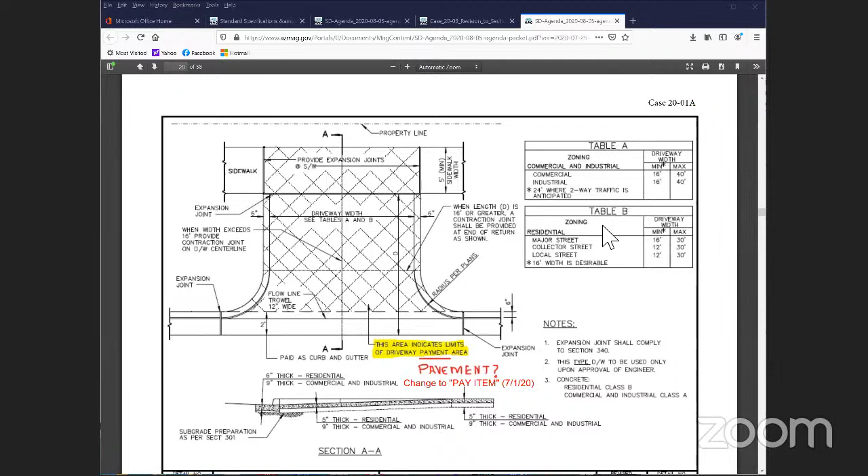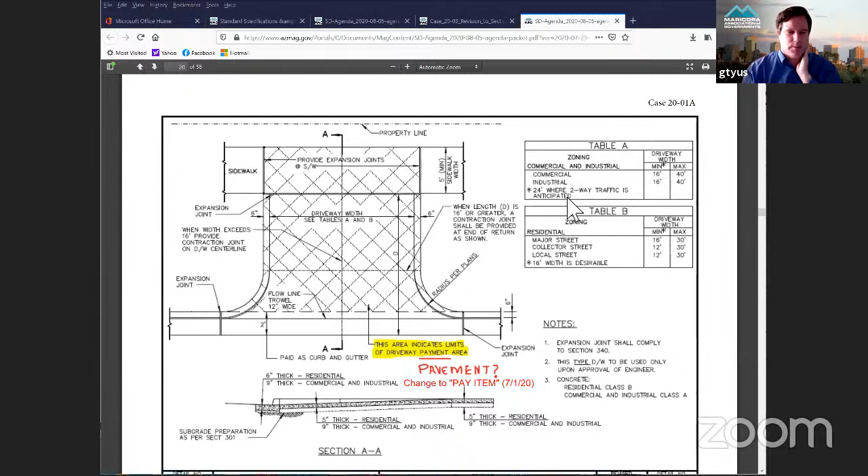Moving on to case 20-01, miscellaneous corrections. Looks like we're up to letter F. Oof. Not sure if there's any additional bloopers cases that might be added, or I think actually we're not allowing any more cases. So there's no new ones, but there were a couple things that were discussed last time that I made updates on in the markups on the details. For example, on the first one, 20-01, I think it was decided last time to change it from payment to pay item. Okay.

Hey, this is Carl. I suggested the pay item, but I was looking at this. I think it's showing a hatch. The diagonal hatch there is the area of the pay item. And again, I kind of wonder if this is older drafting where we might be better off shading the area, because that diagonal could be interpreted as something else besides an area. I don't know if we just want to stick with just changing the word, or would you want to also have it show a shaded area like we did on the other detail?

So Carl, is this one that you're putting through? This wasn't originated from me, but I'm the one that suggested. It was first indicated as pavement, and I said no. I believe it's meaning the pay item area for the measurement and making a progress payment. So I'm just suggesting that should that area be a shaded area like we did on, I think it was 550, the scupper. Right, the spillway.

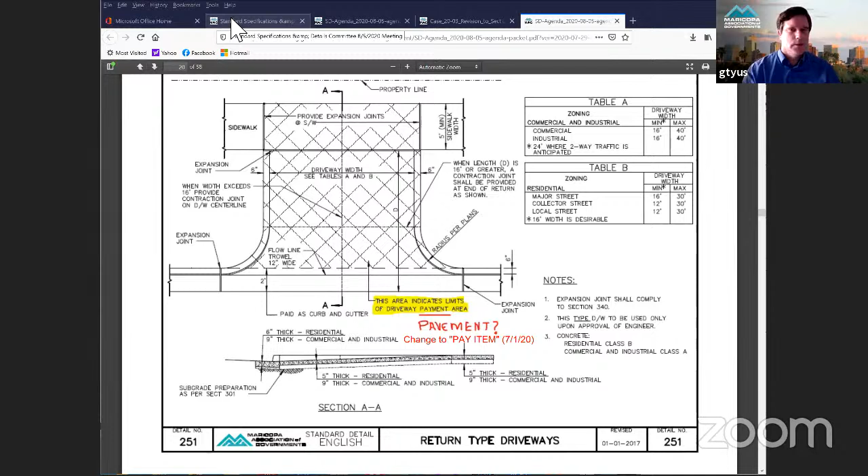Go ahead, Carl. Was it 550 the one we did for the spillway? Or am I thinking of a different one? Yeah, it was the spillway detail. I think we can maybe work with Gordon on that when he's preparing the specs. Maybe that's just a graphics issue we can deal with. But I kind of agree with you, Carl. It could be misleading.

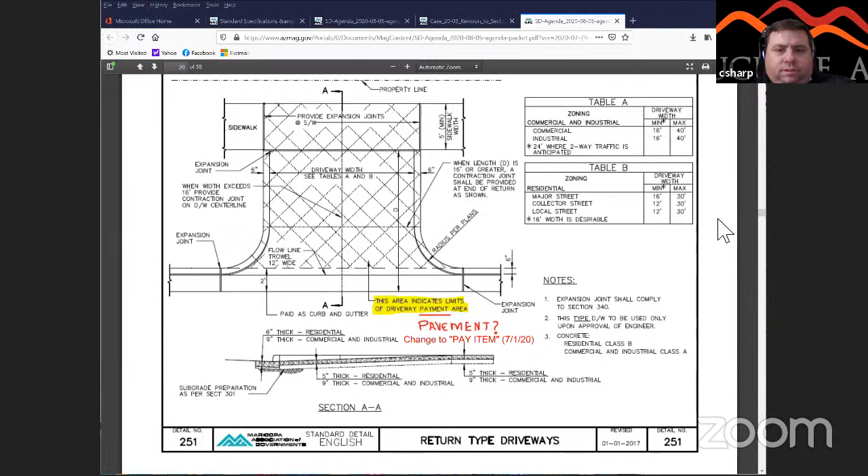I think it's fairly similar to some of the head wall graphics for reinforcing. That's kind of what it looks like. Well, I'm okay if they want to put that kind of steel in there. Well, there's nothing else that indicates steel or mesh or anything. So maybe Gordon could give us a sample of what it looked like shaded as opposed to that hatching. Yeah, I can mess around with it and see if it looks better. You've got to make sure the shading doesn't overpower the other line work there, but I think it would help the detail.

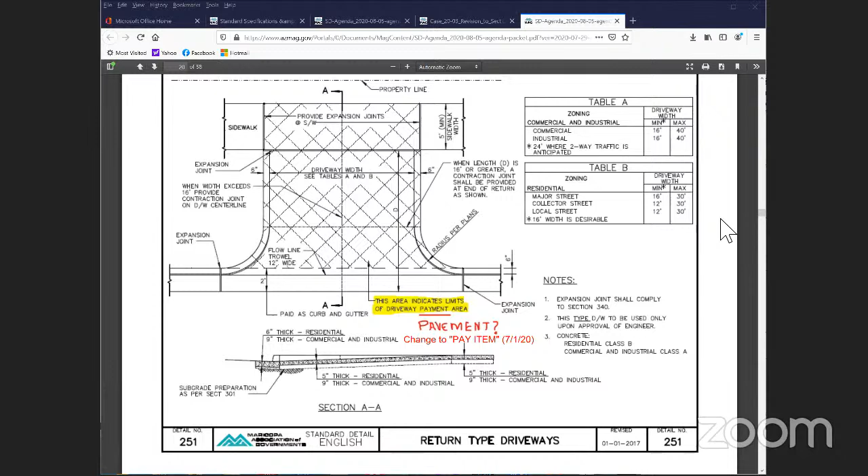Okay. And letter B is just taking the revised off of the detail. Letter C was just changing the ASTM class from 30 to 35. It's from 30 to 35. Okay, it already shows the correction. And moving down to D is just removing the ASTM. And E would have been just this reference to 340, just the simple small change.

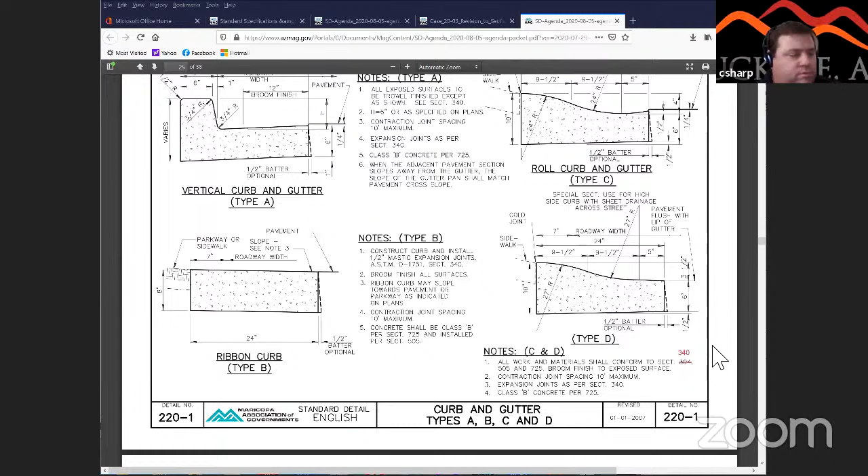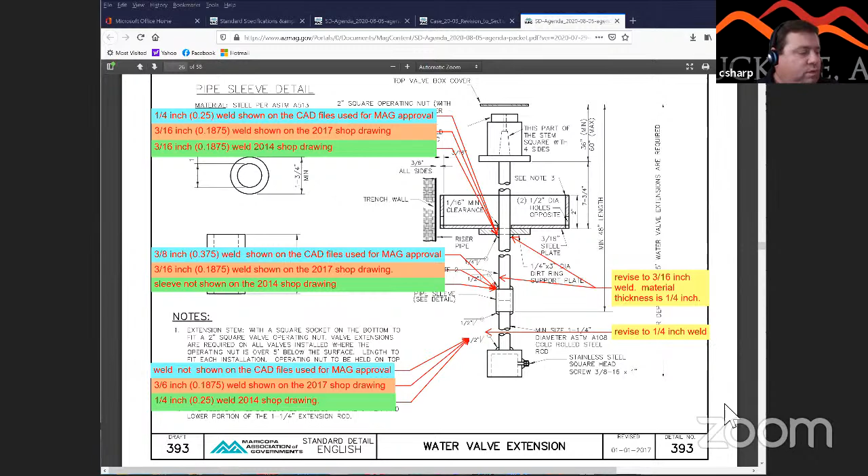And F was the valve extension, just changing the welds on the plate and the pipe sleeve. So the plate and the pipe sleeve would be 3/16, and the nut at the bottom would be a 1/4 inch weld, just to be consistent with the manufacturing. So if we don't have any more, I'd like to move on to item number 7, case 20-02, detail 346 fire line detector check valve.

So when are we going to vote on the bloopers? Next month, or October, or what? I was planning to have them on the agenda for next month. Hopefully we can finish everything up then. All right. So do we need to note in the minutes that this case will be up for vote next month? Yeah, I think that's a good idea, just to make it clear. Okay. All right, thanks.

So item number 7, case 20-02, detail 346 fire line detector check valve. Warren, you've got some information on that? Yes, I do. Gordon had emailed to let me know that this was discussed at the Water and Sewer meeting, and City of Phoenix may still be using this detail. I wanted to discuss with the group how to move forward with it. Personally, I'm okay either way, if it helps City of Phoenix to keep it for now,

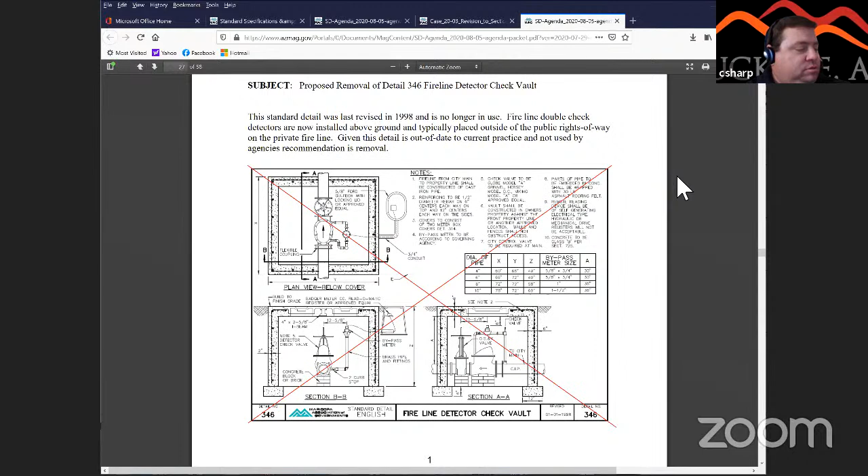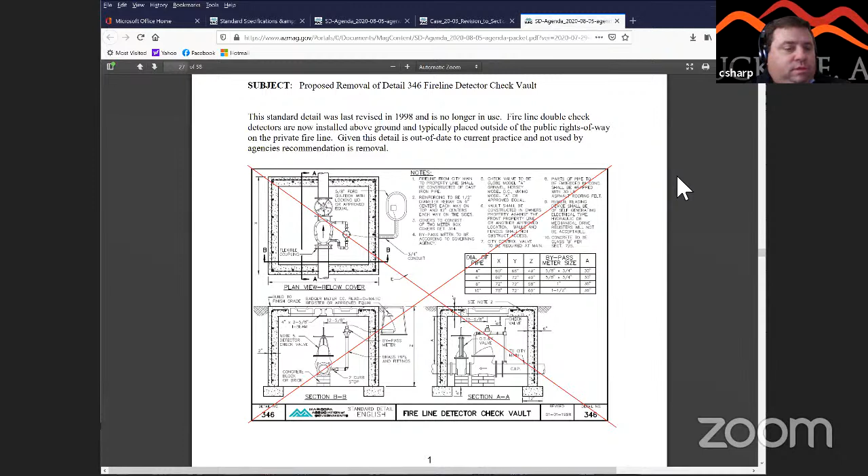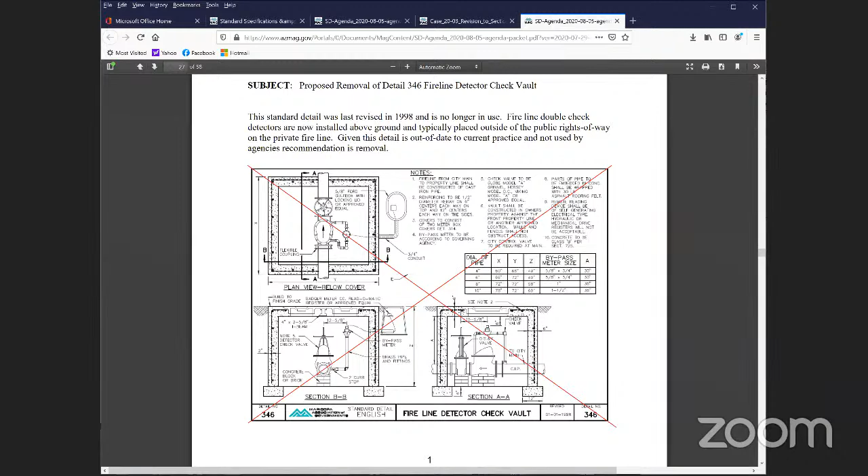That's an option. It would not be a carryover case necessarily, right? Because I wouldn't be the sponsor. Okay, so we would pull it from the 2020 case list, and then somebody could revive it for next year. Is that what we're saying? Yes. This is Peter. As part of the outside right-of-way, we could revive that or bring it up as a case next year in terms of just updating the standards component of it, the references to manufacturers.

And keep in mind, if we were to create a detail, I mean, yeah, the easiest out is just to revise this current detail. But if we wanted to incorporate other above ground double detector checks that are currently being used as more common, then that would be a good option. So you'd have a type A underground, type B above ground, however you want. Right. So it may not be that easy.

No, but we could start that migration, and we've been wanting that for a while, of moving the check valves anyway to an outside right-of-way. Makes sense. So it sounds like, Peter, you would take it on as a 2021 case for outside of right-of-way? Correct. I think that'd be, again, low-hanging fruit for us to grab the first ones just to kind of get the ball rolling on that. And when we get to our group, we'll talk about it a little bit more. We're really getting a lot of expansion of bodies to help now. So this may be a good one to add to the list.

Okay. Well, I think that's a pretty good idea. Is there anybody out there who has opposition to it? Does anybody see any issues with it? Not hearing anything, so it sounds like that's what we'll end up doing: we'll pull it from the 2020 case list, and we'll reintroduce it next year with Peter, with the out of right-of-way group.

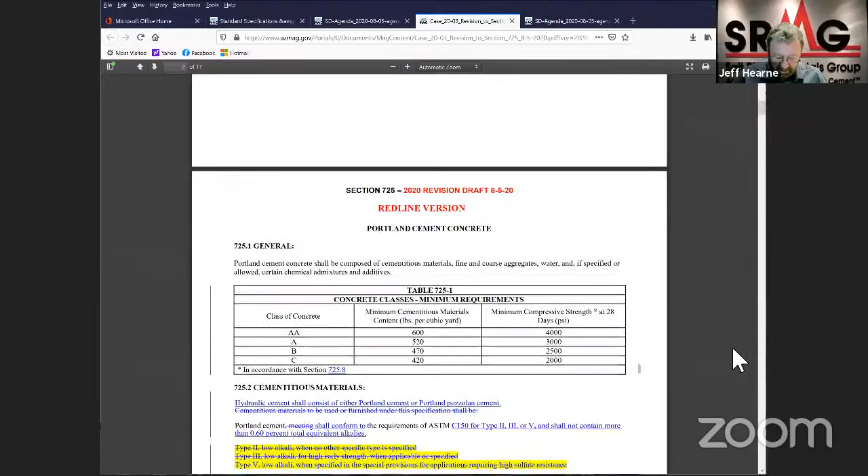So, all right, moving on to item number 8, case 20-03, revision to section 725, the Portland cement concrete. Jeff, are you out there? Thanks, Craig. Gordon sent you guys a revision. Sorry for the last minute revision this morning. So what's in your packet has had a slight revision to it. He's got the cover page up there, and it's just basically some additional language added for clarification to section 725.9A4. So if you want to turn to page 7 of the 725 section, to that particular subsection.

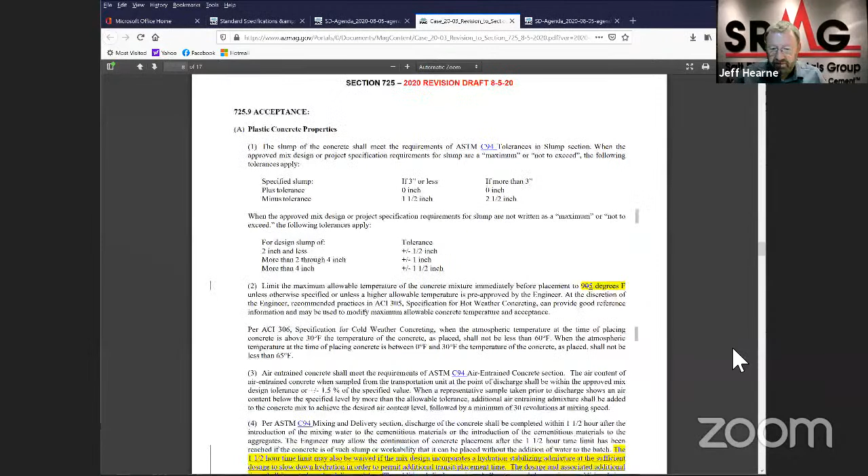Over the last couple of months, the only real comments I've had from agencies have been some clarification to some of the language that's in part 4 there at the very bottom of the page. I had some communication through Warren with Chandler staff and Carl with his staff at McDOT. And then Jose Rodriguez also called me. He and Rob Duvall have been talking about it. We kind of walked our way through it. In each one of the conversations, by the time we were done, everybody was good with the concept of what we were doing. But Jose expressed a concern that maybe there needed to be a little bit of clarification to one of the sentences and maybe an additional sentence to make sure that it's totally clear what we're trying to accomplish. So that's basically what we've done here.

If you see the areas in blue that aren't highlighted in yellow, that's basically what we've added. There was a sentence added after delivery ticket: the additional discharge time shall not exceed the maximum additional time based on the dosage noted on the approved mix design or delivery ticket. And in the next sentence, we took out the words prior approval from the engineer and substituted approval for additional discharge time from the engineer prior to concrete placement. We basically haven't changed any of the language or the intent, but I appreciate Jose's comments and language suggestions, because I think it does help clarify exactly what we're trying to accomplish here. Does anybody have any questions or concerns about that language?

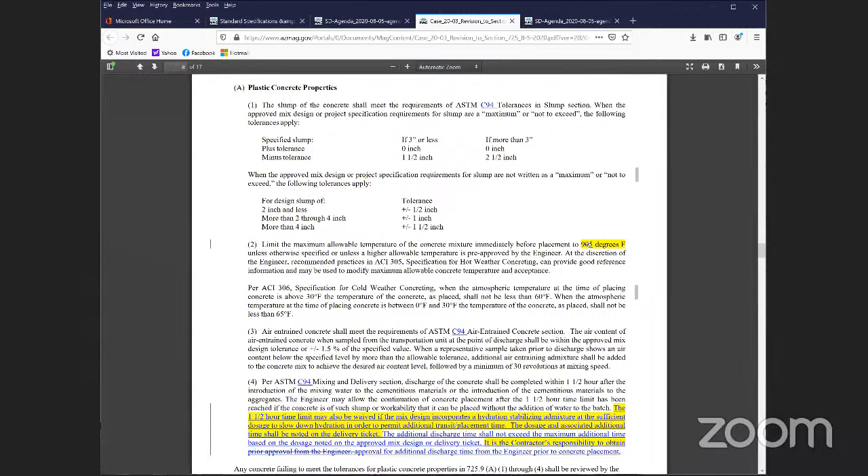Okay, well, I'm not hearing anything, Jeff, so I think I'll ask for a motion. This is Carl. I'll make a motion to approve. Okay, and I'll have the City of Buckeye. I'll second that one. So I guess we'll go through a vote here. Gordon, do you happen to have the voting list handy? There it is. Thank you.

So on case 20-03, the revision to Section 725 Portland Cement Concrete. Avondale? Yes. Buckeye is a yes. Chandler? Yes. El Mirage? Not present. Gilbert? Yes. Glendale? Not present. Goodyear? Not present. Maricopa County? Yes. Mesa? Yes. Peoria? Yes. Phoenix? Yes. Scottsdale? Yes. Surprise? Not present. Tempe? Not present. Youngtown? Not present. So the yeas have it, 9 with 6 not present.

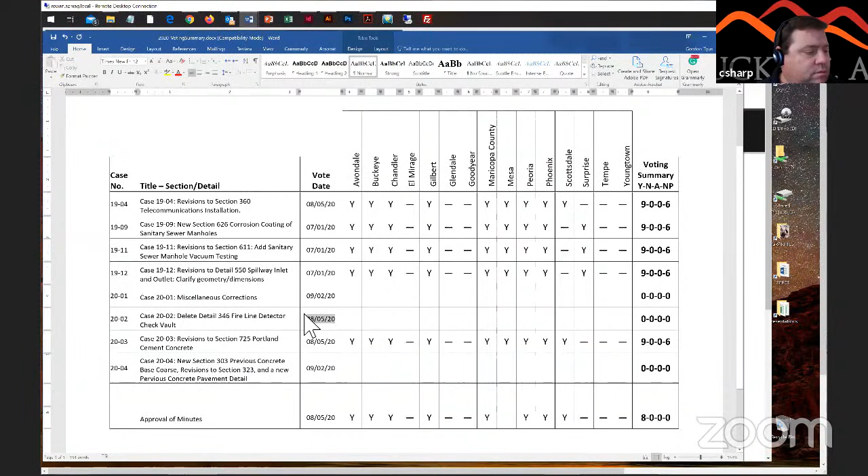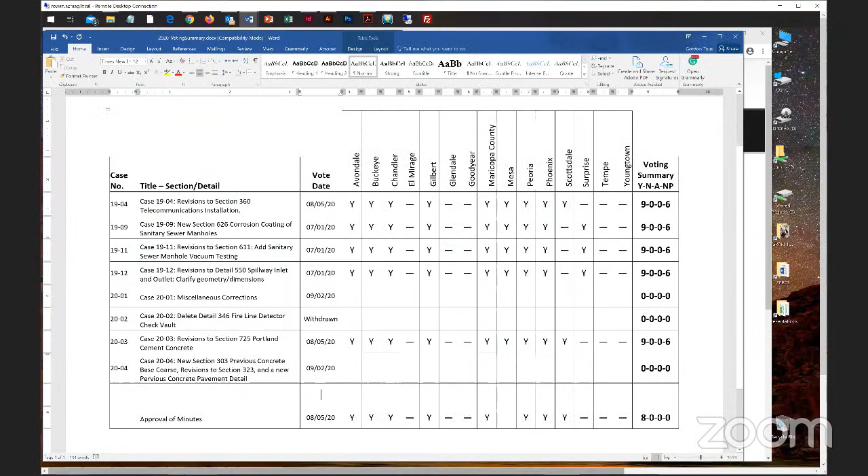So again, thank you, Jeff. You're welcome, Craig, and thanks to the committee and all those who provided information and wording back to me. It's always nice to bring standards up to current code.

So from there, let's move on to item number 9, case 20-04. It's the new Section 303 Pervious Concrete Base Course and revisions to Section 323 Pervious Concrete and new pervious concrete pavement detail. Roy? Hey, hello. Can everybody hear me? Yes. All right.

So first of all, I want to throw out a thanks to Jeff Hearne as well as to Gordon. They introduced the case for the first time at our meeting last month. Unfortunately, I wasn't able to attend, but I wanted to thank them for putting that out there. And I thought I'd give just a little bit of background on the case and what has gone into putting all this together.

The committee way back, I think it was in 2019, had asked for an LID, or low impact development, presentation, which was done at that time. And what spawned off from that was I volunteered to put together a pervious paving case to bring to the committee.

And going through that process, one of the things I've done was research in the valley to find out where we've had pervious concrete installations done as part of one or multiple city projects. And I keyed on the park and ride facilities. In the last several years, we've had a park and ride go up at the City of Glendale, one at the City of Scottsdale, and just recently one at the City of Peoria.

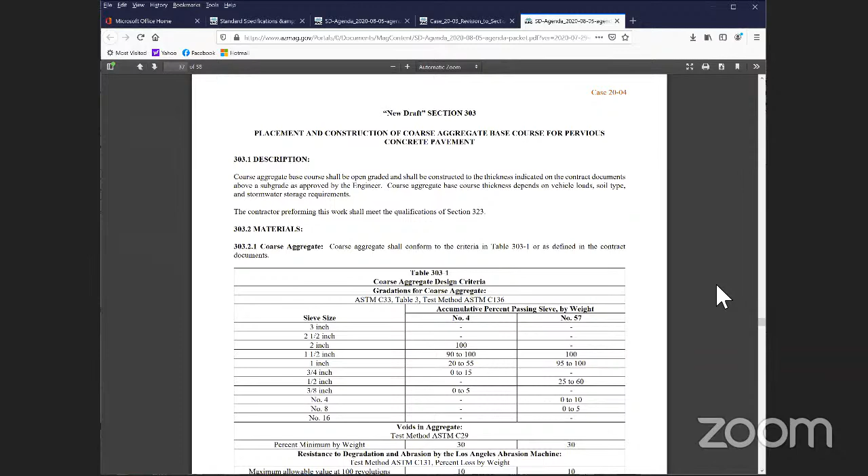I can take it from the last meeting that we had in July, and basically since that point, we did bring this case up again to the materials working group when we met last month, I think around mid-July. And at that time, there were no comments from the materials working group on what you see in front of you. I then did reach out to City of Glendale, basically to Tom Kazmarowski, and solicited comments from him, as well as sent this out again to Mike Riggs, who's the contractor with Progressive Hardscapes, to see if he had any additional comments.

Mike Riggs did not have any additional comments with the case as you see it here. Tom did have just a minor comment on our section 323. And then from that point, I also got some comments from Jose Rodriguez at the City of Phoenix. So I've been very thankful for that. We can either break it into starting with comments, or I can give you a little more background on some of the individual specs, if you would like.

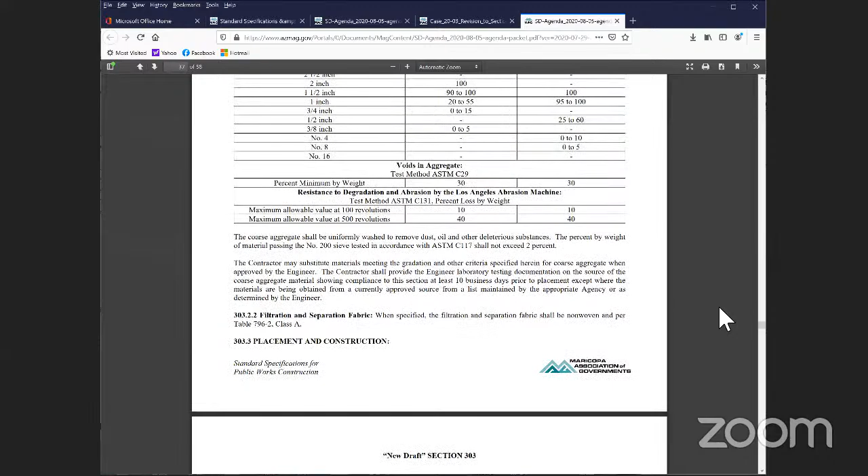So I can just briefly go through the section 303, which is the brand new proposed section specification that we've got. And that's basically, as it's titled, placement construction of coarse aggregate base course for pervious concrete pavement. And what this spec essentially is for is the coarse aggregate base course, which is the layer beneath the pervious concrete. So it's obviously a pervious base course.

Basically in this specification, we call out two different aggregate gradation types, a number 4 rock and a number 57. And those two were chosen because those were basically the two that were used at the park and rides that were mentioned previously, as well as in doing some of the online research. It seemed that those were two, and probably even more so the number 57 rock is a pretty typical gradation that's used for that coarse aggregate base course. But as recommended by the materials working group, we also give the contractor an option to propose a separate or a modified gradation with approval of the engineer.

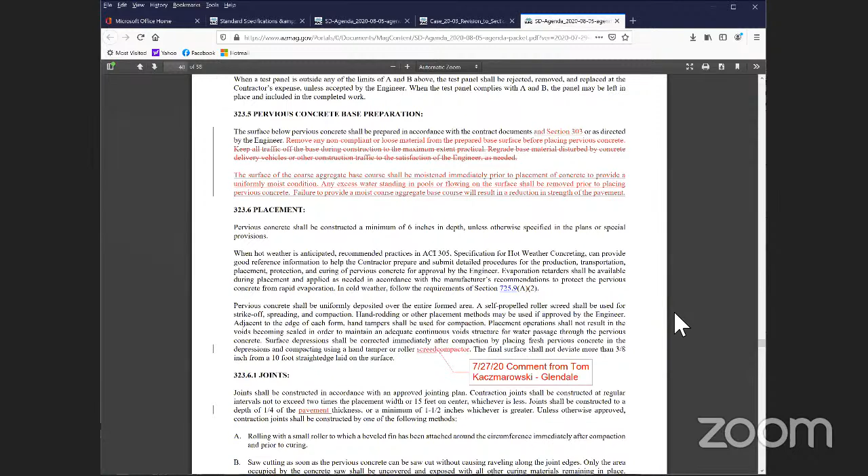And then as we scroll down to 323.6, this is the one comment that Tom from Glendale had actually made. His recommendation was to be consistent with the verbiage that we've used in this spec. You can actually see in that same paragraph, the second sentence, a self-propelled roller screed shall be used for strike off. So instead of calling it out as a roller compactor, call it out as a roller screed. And that definition does seem to be consistent with what you see when you search up the name of that equipment.

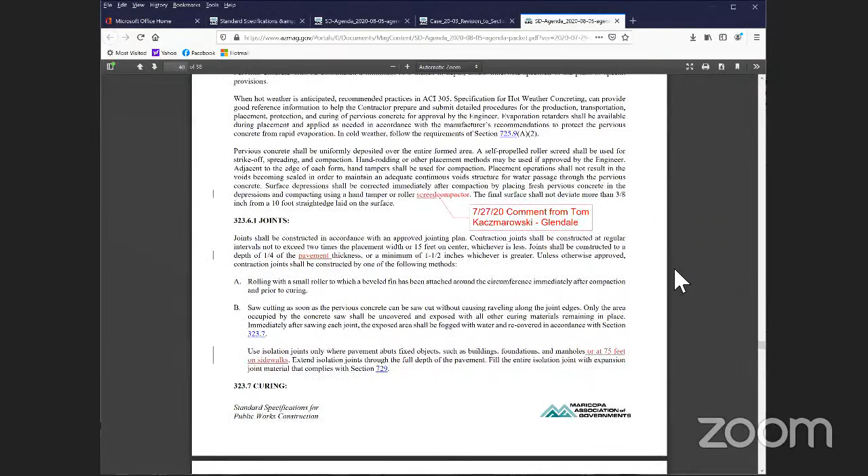I think the next one, 323.6.1 joints, just the word pavement was inserted in there. There was an addition of an isolation joint or expansion joint at 75 feet on sidewalks. And then if we go to the next page, again, another ASTM update from C140 to C1754.

And then something that actually came out a couple of meetings ago at our materials working group, in 323.8. The change was made to the density test, whether you want it at 5,000 square feet or each day, whichever is greater as opposed to whichever is less. So if you've got more than 5,000 square feet, let's say 10,000 square feet going in, you're getting tests per every 5,000 or each day, whichever is greater. So that was the comment that was made there, and I think that's the majority of it.

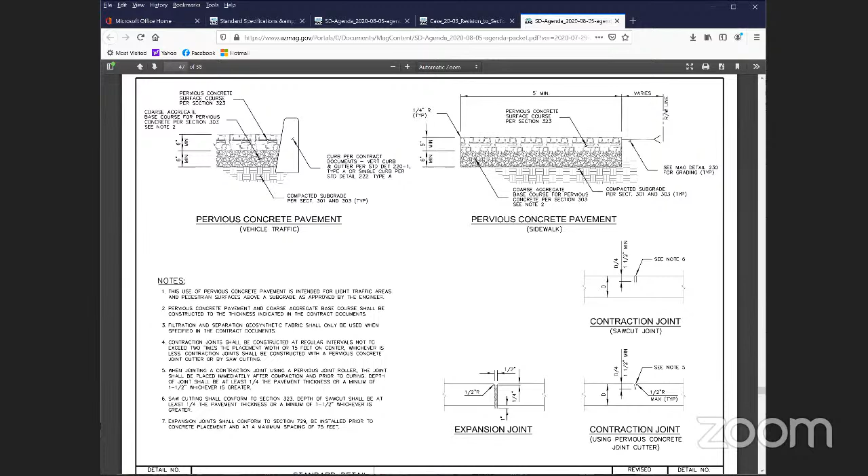I think at the very bottom, there was an update potentially for the committee, whether we look at this as being measured per square yard, like a lot of other concrete that we measure, or keep it as it currently is, which is in square foot. And next is just a clean version that you've got there, Gordon. If we go down to the detail, we've provided a quick section for a pervious concrete pavement for vehicle traffic, and one also for sidewalk installation.

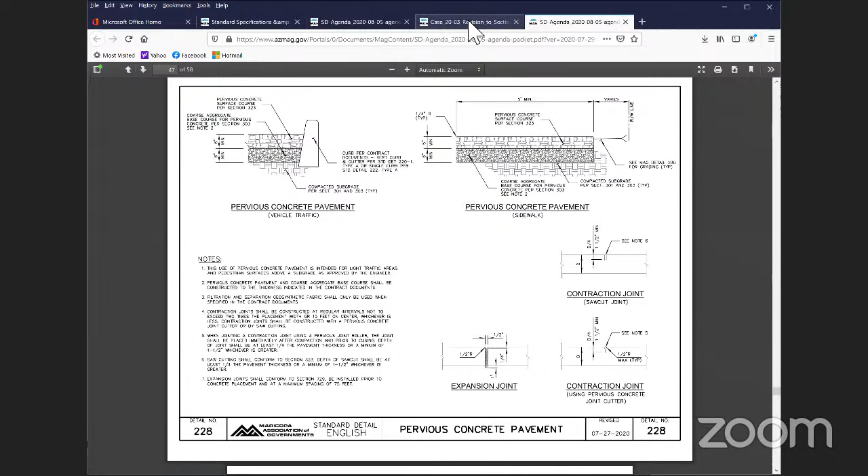This was actually, Jose had a couple of comments. I don't know, Jose, if you want to just start or throw your comments out there, or start some discussion on comments. Yeah, Roy. I mean, my main comment was mainly whether or not we should be providing a section. I'm not too knowledgeable on this.

When reading through the spec and through the detail, nothing really says that it's not intended to be placed on the right of way. I'm just concerned that some designer down the line will just grab the detail and throw it in there, say, hey, just follow this pavement section, because at the end of the day, it wouldn't meet the detail requirement. So I understand now the intent is to provide something, but we should clarify either more in the detail or in the spec.

The intent is not to replace a normal street pavement section. So this is really intended, at least for the pavement part of it, to be outside of the right of way. And for the sidewalk, I don't have any issue with the minimum thickness being called out for the sidewalk.

Yeah, I guess if we look at the pervious concrete pavement section that we got, the 6-inch min, that was, I want to say, pretty standard with a lot of the information that you see out there for at least a minimum thickness. You really don't want a thickness less than 6 inches. Obviously, because this is a drainage system, the thickness of your pervious concrete as well as of your coarse aggregate base course are a function of how much rain or water you're expecting on the site. So I felt at least putting in a minimum out there would be appropriate, much the same as we call out minimums in other parts of our details.

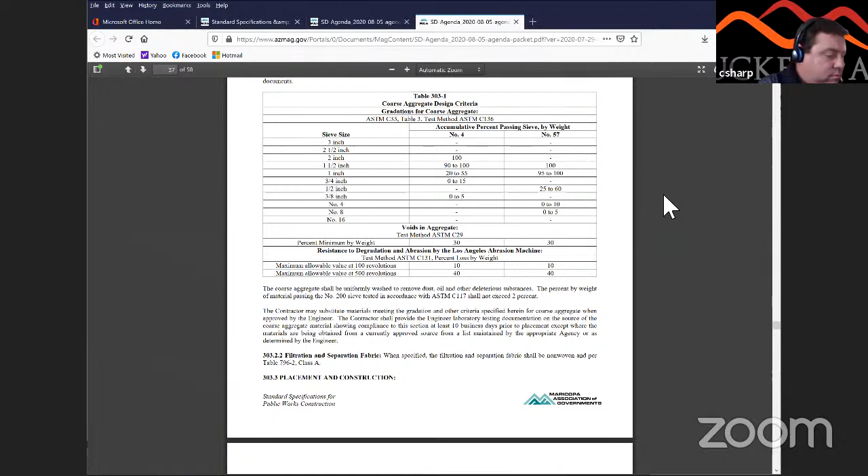I guess my initial thought on that is the intent for this pervious concrete isn't necessarily to be used on your high speed roads. This is more for what we're calling light duty or parking lot type areas.

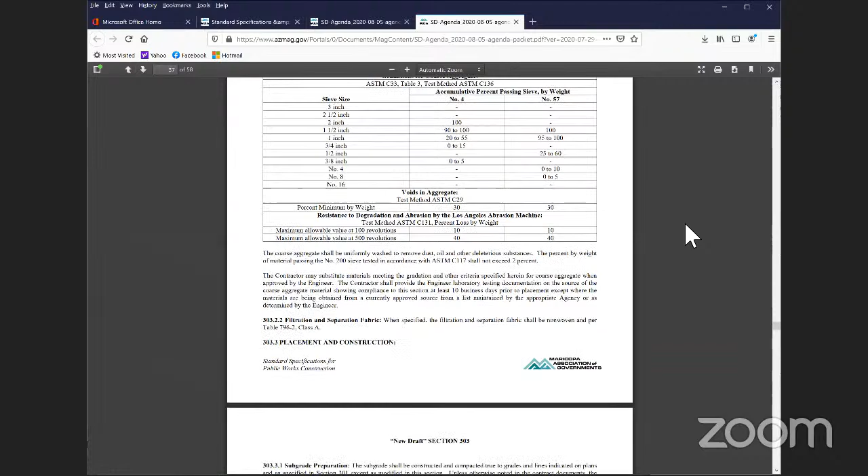And as far as the fractured faces go, my initial thought, and I'll open it up to the committee, is I don't know that the fractured faces are as critical with the pervious design, because you want those voids. So you don't have as tight of a compacted layer for that sub base as you would for your typical paving; you're wanting it to have a void ratio or permeability, so that water is flowing through.

And I think I've seen online where in some places they don't even specify that the coarse aggregate necessarily has to be angular, that you're wanting the voids, you're wanting the percolation to go through that coarse aggregate layer. Yeah, I just wonder about an unfractured, we'll call it just a river rock with smooth surfaces and round edges, understanding that the drainage is the key to this.

But with round rock, you're not going to have anything locking together for actual structural support for the pavement itself. Walk on a crushed stone stockpile and you'll sink a little bit, but walk on a river rock stockpile and you're going to sink quite a bit more. I don't know much about pervious concrete and all the design aspects to it, but it's a question that came up because we're actually dealing with that right now out here, and it's been a concern.

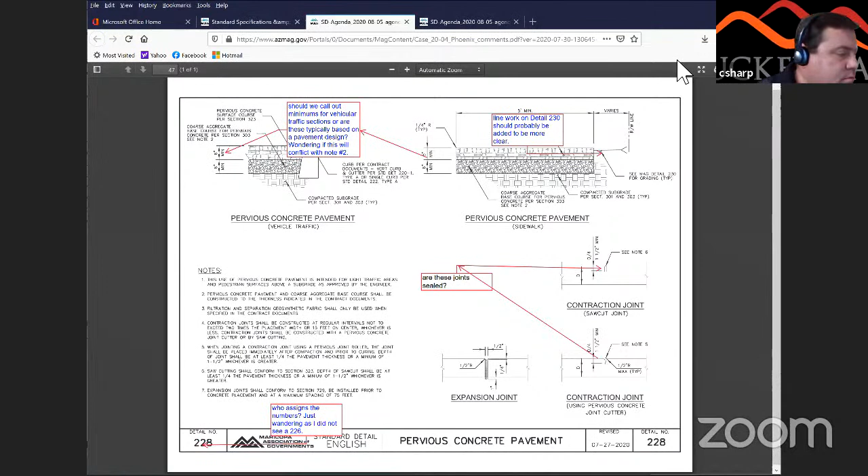Yeah, Craig, I think we're actually looking at doing this in some of our new upcoming buildings around Avondale, and we've had some discussions on it, and what I've heard is that we might put like a real concrete header around some of these areas to put an edge on it, and then for the jointing, they're actually talking about using, like you see around pool decking, those, I don't know what you call them, drain joints or whatever. Mm-hmm. To work with this stuff, but it's only going to be in common areas with pedestrians. There'd be no vehicles, and it's just because you got large concrete enclosures and it's just hard to find a way to drain it. This is where it comes in handy. So. Yeah, that's right, Jim.

And that gives a lot of versatility to be a little bit creative with these materials. Even in some parking lots, you'll see that they'll have curbing around the edges that basically contains the pervious concrete in the middle, like you would see in a normal application. So you don't see applications very often where you have the actual pervious as a standalone edging all by itself without something else around it. Yeah, I mean, I don't know. I've never watched it go down other than the video, and so I don't know how difficult it is.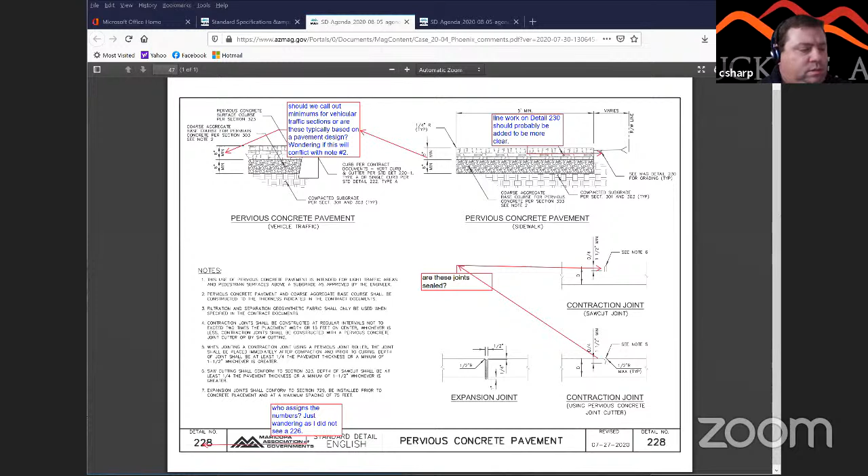Yeah, like I said, I got a handful of questions, and those videos will probably help. And again, I'm just not versed in pervious concrete. I've still got the brain set of nice hard concrete, creamy top, edges, joints. So I'll go back and look at those, and if I have any additional comments or questions, Roy, I'll just get a hold of you. That sounds great, and I feel for your struggle, because I've had a lot of it myself. This product is somewhat counterintuitive to what I've been used to as an engineer, wanting to make sure your subgrade is nice and overly compacted, or you can't have too much compaction, and this is just different. Right. I'll have to watch those videos and try to wrap my head around it.

One comment I have, Roy, is on that detail 228, where you call out the curb per contract documents. I would like to have us add in a ribbon curb as an option too. To actually call out the detail for the ribbon curb is what you're thinking? Yeah, because from what we're seeing, we're going to end up doing some kind of header, or we call it ribbon curb, something that's flush with the surface of the pervious concrete pavement. What you're going to see is a ribbon curb application, so I think it might be a good idea to include that here as an option. Certainly, I can definitely add that.

Hey, Roy, this is Warren, and this kind of chimes into what Jim was saying. On my visits to California, I noticed in some of their private streets, along the edges, there's a pervious strip along the curb edging before you get to the actual gutter. So maybe their intent was to use the edges of the roadways for the pervious drainage too. So just as a consideration in this detail or others down the road, that might be an application for it too. Oh, that's good. I can send you a picture if you'd like to see the location in California. Sure.

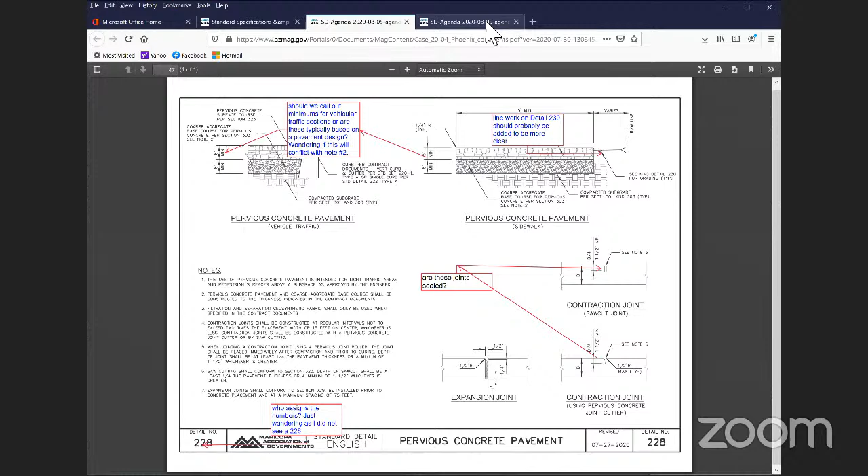Okay. And we have that called out, if anybody's interested, in the general section of section 323. I think it's 323.3. It calls out all the different certifications that are required by the contractor. I'm sorry, 323.3 under general. Shall be experienced in the installation of pervious concrete and shall employ no less than. So yeah, this isn't intended for people that have never done pervious before to use this product. This isn't what we're specifying in these documents. All right.

Well, Roy, thank you. Like I've always said, I like new technology, and I apologize that I'm very uneducated on this, but I plan on going through some of these videos and seeing if I can get a little more up to speed on it. Thank you, appreciate it. Any other comments?

This is Peter. I just wanted to mention that we would like to see if we can get this through this year. The desire is not to have this be a carryover case, so please have your folks look this through and let's see if we can get this voted on this year. And any comments anybody has, either yourself or through your work groups, feel free to send them my direction. Okay. Gordon, I believe after this meeting, are we just looking at one more in September? That's the current plan. So it's going to be really tough to get it through this year, being that we've only got one more meeting. We would have to vote on it next meeting.

So, Gordon, what do you think? We'll bring that up in today's meeting in our general discussion to see where everybody sits with that, and maybe make a decision this meeting. That's fine. Okay, we can move on then. I think that's a good idea. So again, thank you, Roy. I like new technology. I think everybody's pretty much on board, and we will move forward.

Okay, thank you. Item number 10, new and potential cases. This is discussion for potential cases in 2021. Miscellaneous corrections, revisions to section 610.4C, changing reference HDPE and PVC to a thermoplastic pipe. I'm not remembering who actually brought that up, but I think it was in terms of, since we have so many different flexible conduits that are coming into the system, there's HDPE, PVC, PE, changing it to a thermoplastic to kind of incorporate all of the different options.

And the next bullet item, detail 212, the utility pothole repair. Hey, Craig, on that first item, that might have been from Stu Waller. I think you might have received that from him, if I recall. Oh, did that come in from Stu? Yes, he brought it up at the Water Sewer Working Group meeting. Okay. So the next bullet, they're talking about utility pothole repair. Arvid, are you out there? I don't remember hearing you. I don't think he's out there, but I think Arvid was going to try to move this forward in the 2021 caseload. So we've been working on that in the water and sewer working group as well.

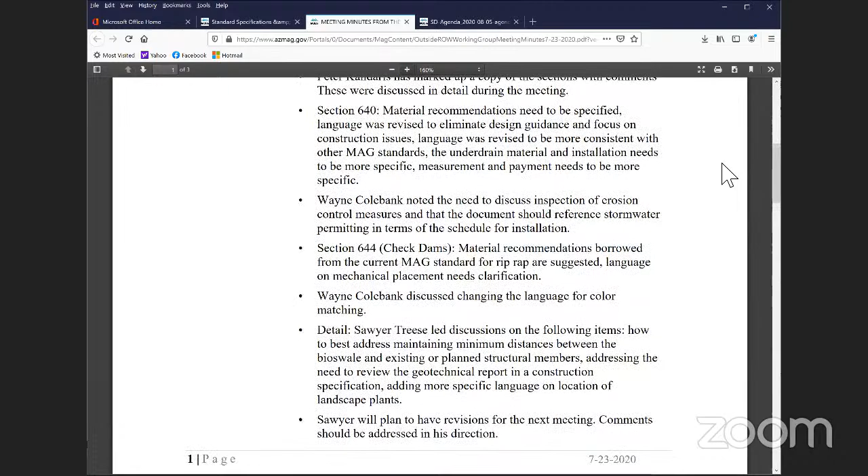So, yeah, I'm not going to go through all the notes, but we basically had a long discussion on the draft and the state that it's at right now. It definitely will be ready in January to be presented, and this, I think, fits the definition of outside of right-of-way perfectly. We wanted to use the vegetated bioswale as kind of the example one, and now that we've got a number of new people who've never done these, they're seeing how it looks, and what a MAG specification is, or they've been calling it magifying the specification process.

And so Eric Bonds with the City of Phoenix is putting together one that is dealing with sediment trap detail. Keith Kesty is also looking at putting one together for the curb cuts related specifically to the drainage systems that go to these low impact development type systems. These are all coming out of the LID document that has been put out, and we're now trying to convert them from design documents to construction documents. That's been our big challenge. But I think the group is learning quite a bit on that.

We talked about some future work. The county has given us a short presentation on some of their test plots for their drainage systems. The key person there was on vacation this past time, so we're hoping he can give us an update. We're trying to look to see how that's going to be adapted into it.

The next item I want to talk about was one of the most interesting ones. We had a small group break off to talk to landscape architects and look at their systems and a number of MAG details, and that's why I mentioned that we're thinking there may be in the long run the ability to have another working group, which would be basically an architectural working group that would take on a lot of those orphan specs that have been languishing for a long time and start addressing those.

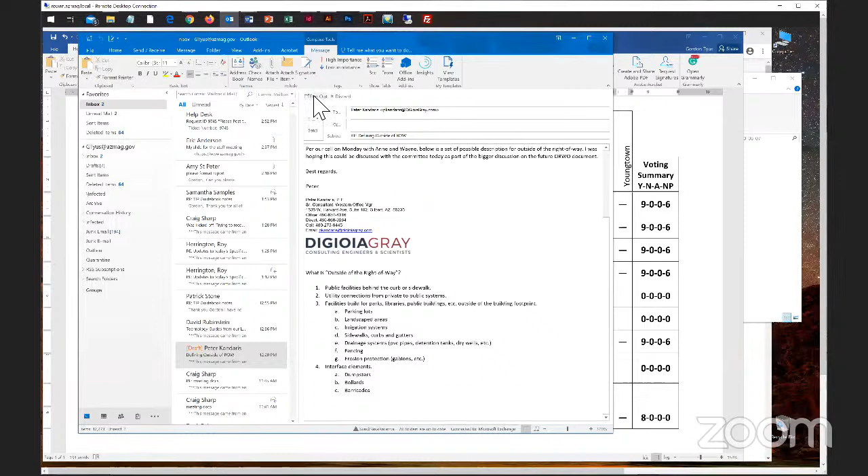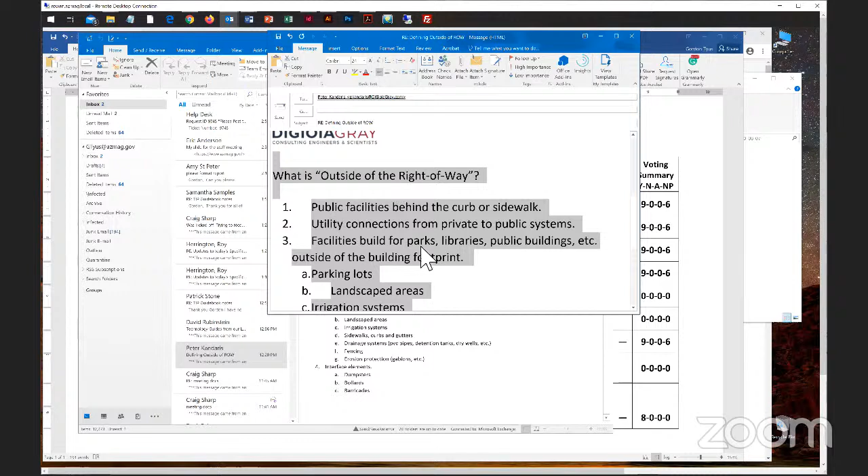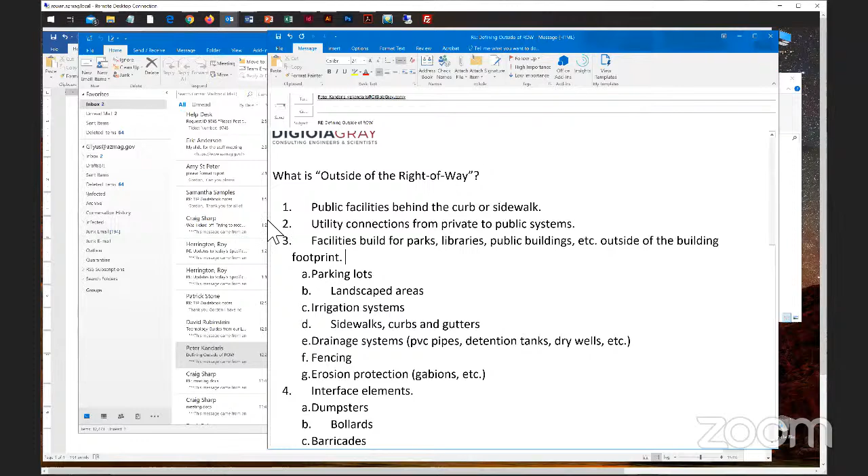Yes. Okay. Well, basically, I was trying to throw some ideas around. The question came to me: what's outside of right-of-way? I'll start just throwing random concepts: these are public facilities behind the curb or sidewalk. That sometimes fits the definition. Utility connections from private to public, for example, the backflow preventers and things like that. They tend to be something where we're going from a public side to a private side. Facilities built for parks, libraries, public buildings, etc. Anything outside the building footprint, but not in the streets.

And you would have, this is where the parallel stuff comes in: parking lots, landscaped areas, irrigation systems, the different types of sidewalks, curbs, and gutters that are used off-site that are different than are used for the right-of-way work. Drainage systems, the PVC pipes, detention tanks, drywells, and such. Fencing potentially could be more of an outside right-of-way. We're generally not driving through fences, but there's something that's used on both right-of-way and outside right-of-way projects.

Erosion protection, again, another parallel one with gabions and such. Other interface elements we've talked about before, dumpsters, the facilities that are in a lot of the supplements, and bollards that are definitely one of those, barricades potentially. We could make the list longer, but I want to start throwing these out so we can give a definition and have this added to or modified, so we can get this group having a bit, now that there's going to be likely a separate book, I think it's going to need to have its own identity of what it's really focused on.

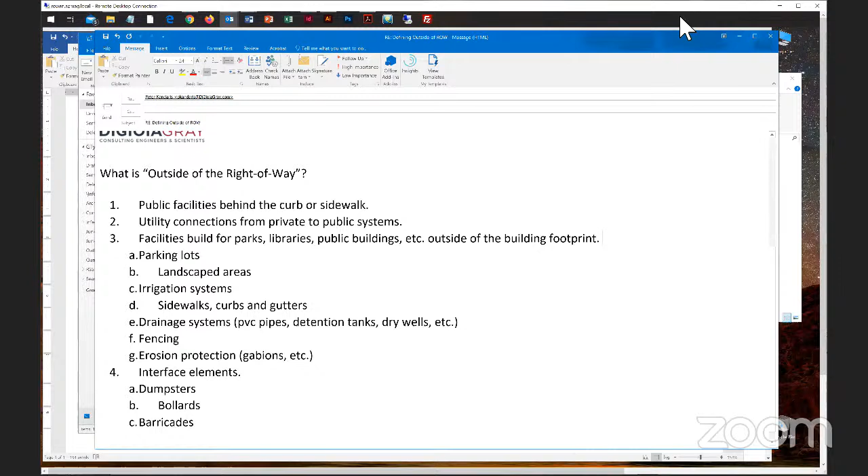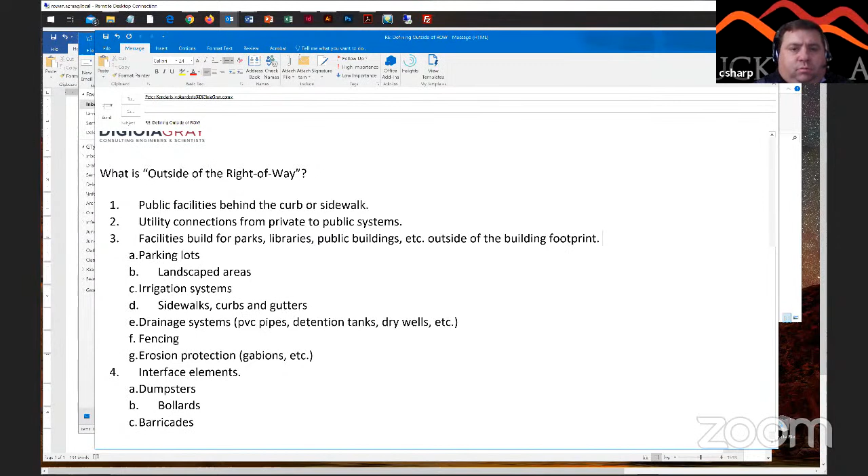Peter, were you thinking of creating a general conditions section also, similar to what's in the current MAG book, with abbreviations and bidding requirements, scope of work, that type of item, or would you just reference? I think the goal would be to reference as much in the existing MAG as possible. I don't think there's a desire to necessarily, because again, we're not talking about private construction. We know others are going to use it, but these are things that are used by the agencies, for the agencies, for their facilities. It's just a different type of application. So I'd like to avoid that. I know at one time we talked about it, and I went back to my old list from a number of years ago. My thinking is let's try to reference as much as we can in the existing MAG.

And maybe that's the best idea, the items that don't actually cross-reference to the existing MAG, to the outside right-of-way. I like your idea of throwing a 1 in front of it. If you're looking for parking lot asphalt, instead of it's 321, it's 1321. Yeah. So we'll definitely have some work ahead.

The other angle to think about, Greg, is maybe even putting alpha characters there, to really differentiate, so make it ROW 1301 or something like that, or it'd be ORW, out of right-of-way, something like that, that really throws it out there that this isn't the standard MAG kind of determination.